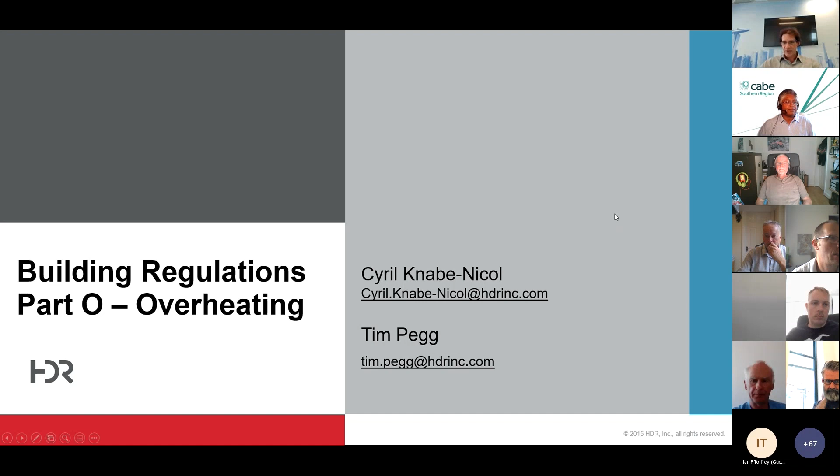So if we dive into the presentation now directly, if I can change the page. There we go. So building regulation Part O started to take full enforcement just a month ago now, on the 15th of June. This regulation is applicable to all new residential schemes.

There is a tricky aspect, in that Part O also applies to long stay residential, such as care homes and student accommodation, which can represent a more challenging approach to mitigate overheating, as the dynamic of the system is very different than what you'll find in a typical residential property.

Part O, in terms of building regulation, is also linked to Part L in terms of transitional arrangement. So if a scheme has been registered with Part L and you are within the current 12 months of transitional arrangement within your notice, you don't necessarily need to apply Part O.

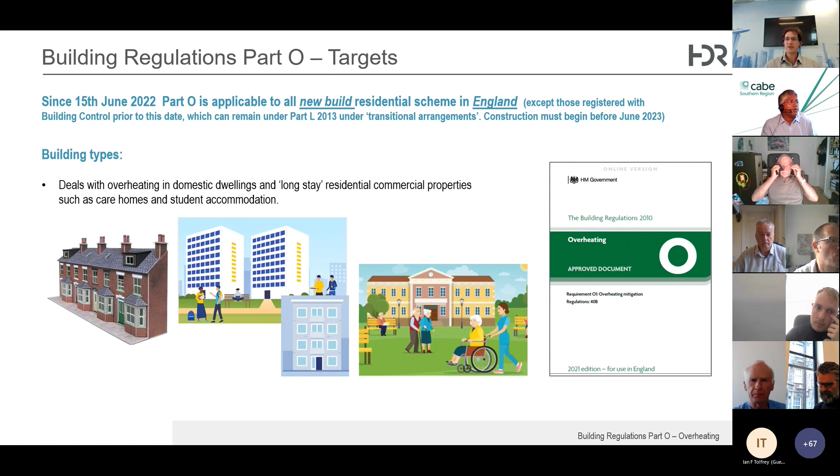And that means the construction of the dwellings or the block you're looking at need to start before June 2023. So the purpose of Part O, essentially, is to mitigate overheating within the dwelling, especially looking at unwanted solar gain.

And all of that is taking place in how you're going to set up your dwellings in terms of orientation, massing, shape, form, ratio of glazing. And we need to provide a means to remove the heat from the building to the external aspect.

Part O considers two different methodologies to assess this. We have what we call the simplified method, and if we cannot use the simplified method, we need to demonstrate compliance using a dynamic overheating assessment.

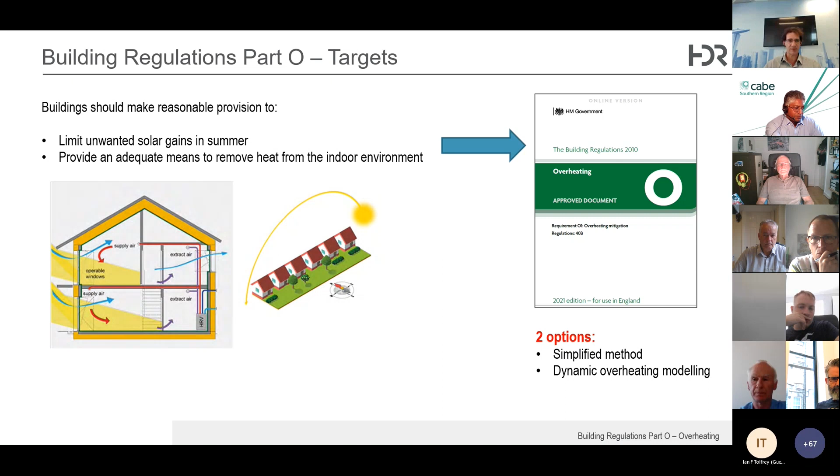So if you are looking at the Part O appendices and you want to develop your project, you have a list of postcodes which tells you which areas are at risk currently and what needs to be focused on.

There is another aspect I would like to touch on as well: Part O is a statutory requirement as part of building regulation. But what you need to keep in mind is overheating is increasingly focused on and reviewed by local authorities now. So even if you could use a simplified method because it's easier and applicable to your project, it's possible that the local authority will push you to assess the dwelling based on the more dynamic simulation.

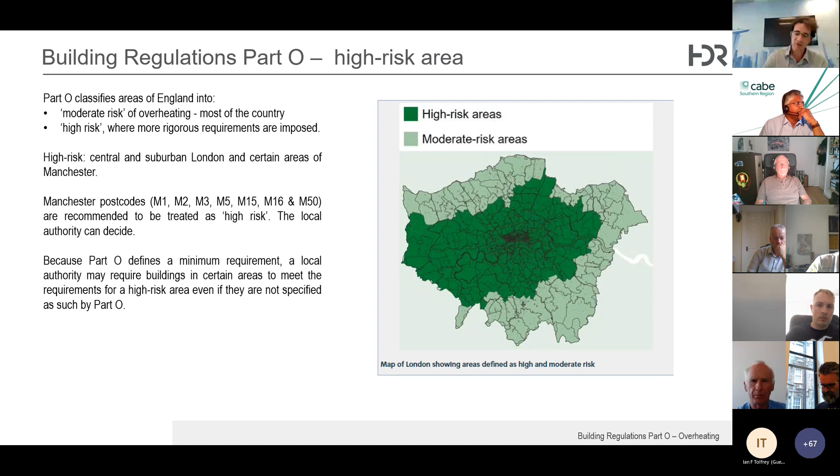In London, for example, and the surrounding area, most projects now are all assessed around the dynamic methodology. We're not even considering the simplified method. This is also applicable to some areas around Birmingham, Manchester, Leeds, and Brighton as well. So you need to be mindful not only of the regulation, but of what local authorities are aspiring to moving forward.

So, openability of the windows. How are we deciding which methodology we need to follow, either simplified or the dynamic simulation?

We need to ensure that the surroundings of the building allow us to use the simplified method. The first one is noise. If the noise level exceeds an average of 40 dB over a period of 8 hours, which means that we cannot open the windows for assessing overheating, we cannot use the simplified method. If we go above 55 dB over 10 times at night, it's the same thing, as a peak. We cannot open the windows, and therefore we need to go straight to a dynamic simulation.

This requires getting an acoustician involved very early in a project to assess the location of your site. A lot of sites now being redeveloped around train lines, busy roads, close to airports, around the Slough area, mean that we cannot use the simplified method and need to go straight to a full dynamic simulation.

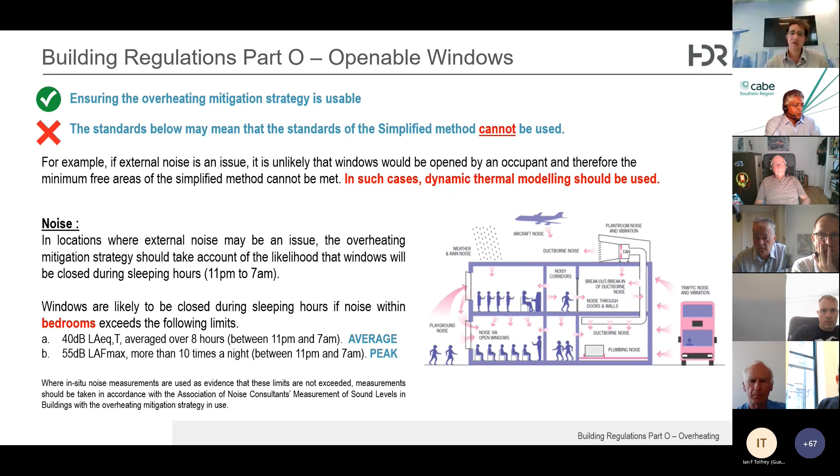This also needs to be reviewed in accordance with the ANC guidance that was provided in March 2021, which sets out some noise levels as well. So I would recommend that when you start looking at the site, engage with an acoustician so they can give you an indication of how you can deal with openability of the windows.

The other element is pollution in terms of air quality. Outside the big cities now it's not too much of an issue, but we need to assess the air quality if you're close to a train line or busy road as well. That can have an implication.

Security - essentially how we can open the window is critical for ground floor bedrooms and ground floor dwellings, whether in a block of flats or houses. Security measures need to be taken into consideration, and the flexibility and lockability of the window need to be assessed to decide what kind of methodology we need to use.

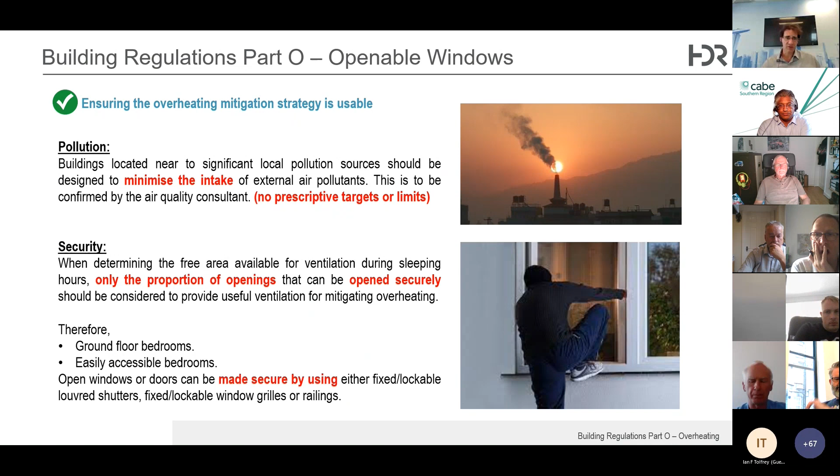And the last one is protection from falling. Part O has a very strong view on how the window can be opened depending on the height of the building, and this is linked with approved document Part K.

The area of window that can be opened depends on how you are standing in the inward face of the wall, and you need to have at most approximately 650 mil to the handle. So this essentially restricts your area of aperture for the window and the amount of fresh air you can use. Depending on how that works, you can use the simplified method, but it will restrict significantly the area of fresh air that you have.

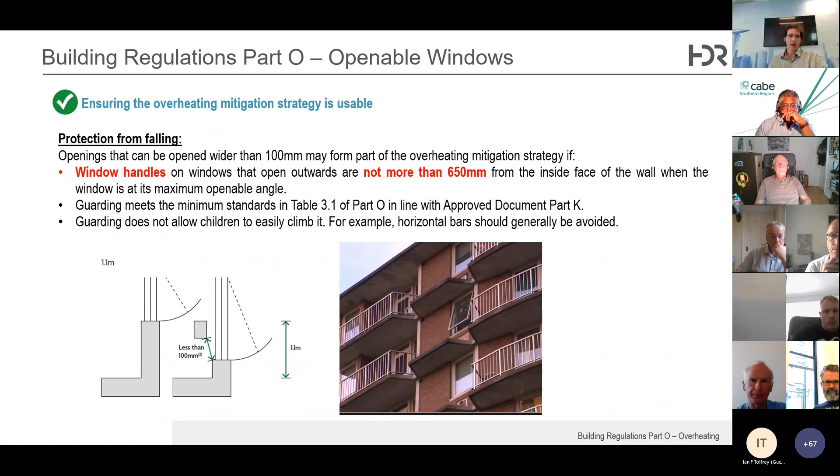So two options, the first one is a simplified method. How can we define if we want to use this methodology? If none of the previously mentioned constraints apply to the property you're designing, and you establish that the design can apply purge ventilation to every habitable room with openable windows, then we can use a simplified method.

Also when looking at multiple dwelling sites, especially blocks of flats, we need to ensure the distribution of hot water and space heating is done through a vertical riser, not horizontal, so we avoid impacting or mitigating overheating within the corridors. If you satisfy this criteria, we can use a simplified method.

If not, we will need to go to a thermodynamic model, linked to an adapted version of the CIBSE TM59, which covers overheating in new dwellings. That will dictate the windows, how we mitigate closed windows, how we mitigate noise pollution, and how shading can impact design. We'll come back later through the dynamic simulation to explain the process.

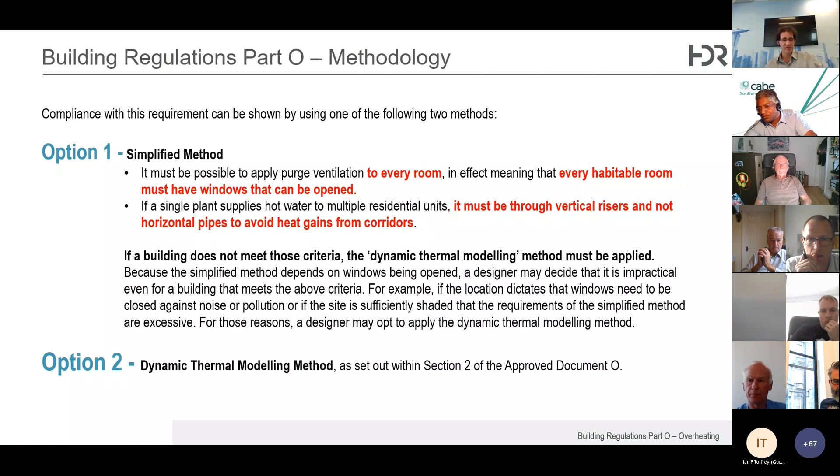So there are two aspects to a simplified method. The first is we need to ensure we have a maximum allowable window area to the building and habitable room, and that there is a minimum openable area to those windows. These are the two criteria, rationalized in relation to your floor area.

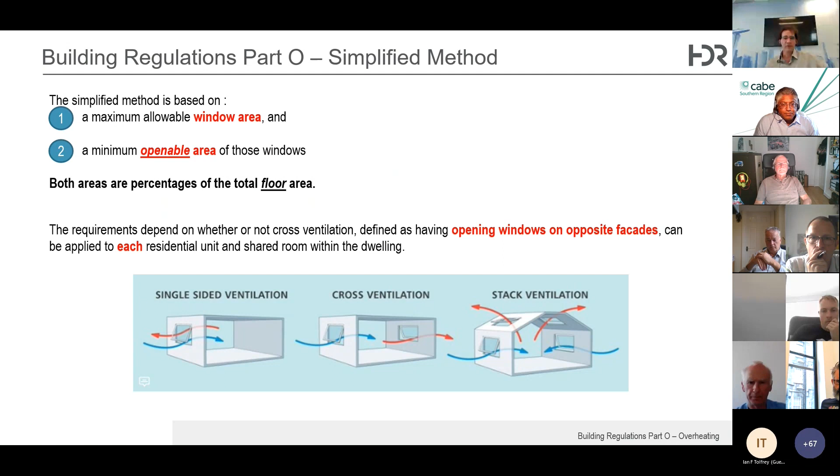Essentially, we need to ensure the requirement depends on whether cross ventilation is possible with openable windows on each facade, which is the example in the middle, or if you don't have cross ventilation, which is the left-hand side. So without cross ventilation, what are we looking at?

Depending on the orientation of your facade, we need to assess that the maximum glazing area does not exceed either 15% or 11%, and also that the area of glazing, in relation to the floor area, does not exceed the value on the left-hand side.

As you can see, the key element—if you remember the areas of high risk and low risk—depending on where your dwelling is, you have different values allocated for how big your glazing area can be. On the south facade in a high risk location, we only allow 11% glazing, whereas in a moderate area we can push that up to 15%. This is quite a significant change depending on the location of the building.

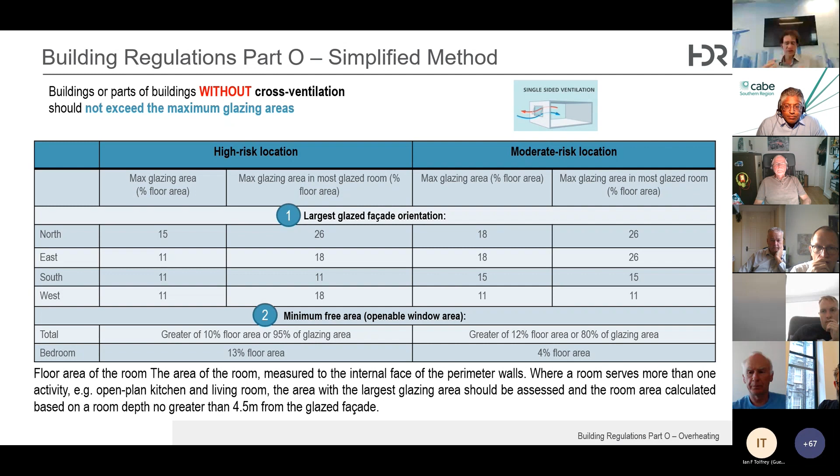The free area is how much your window can open. In total, we need at least 10% of the floor area that can be open. For a bedroom, we're looking at approximately 13% openable area in high risk, dropping to 4% in moderate risk. The measurement is essentially established for the whole of the walls, on a room-per-room basis.

When we have cross ventilation, we get a lot more flexibility, because the flow of air going through the building helps cool it, and there is movement allowing a larger area of glazing. So we are exceeding 18% on the east and west facades, and around 15% on the south and north. The maximum glazing area goes up to 37% depending on orientation.

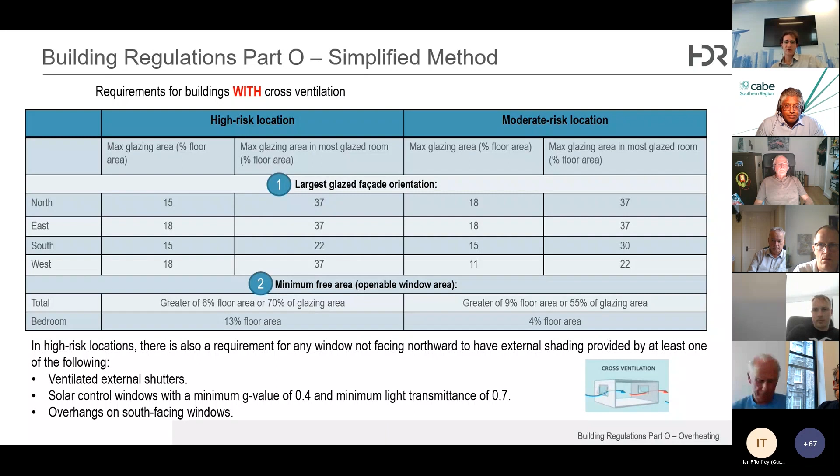What we're focusing on here is that there is a risk for any window not facing north to require external shading, so shading is also very critical. You can take into consideration external shutters, solar control such as solar film applicable to windows, and overhangs are also recommended on the south facing facade.

So what did we do to understand what this simplified method means? We worked on a project which is a three-story building—ground, first and second floor—with cross ventilation used there. We measured the floor area, shown here as a red line around the perimeter of the building, and used this data in the calculation.

Within the document, there is a link to a full Excel table that can help you get the calculation done. We've done an example based on these dwellings.

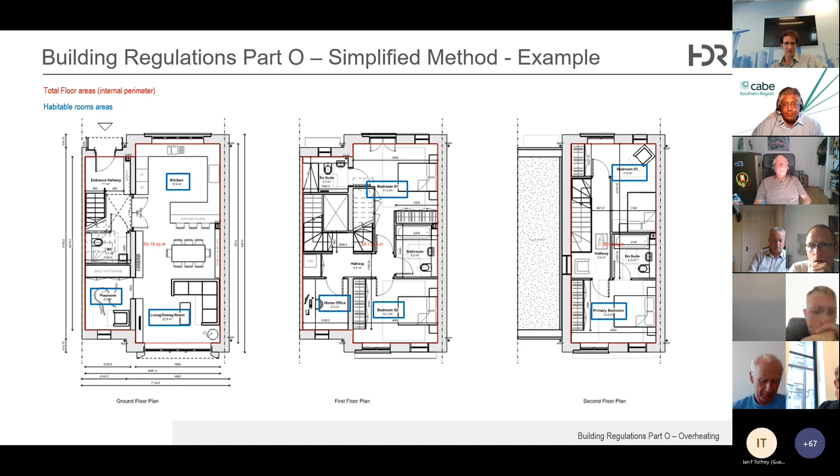In terms of windows, how do you calculate the area? You need to take the glazed area, however the frame needs to be excluded. This is a big difference between Part O and Part L. When you look at windows on Part L, the energy side, you include the frame for heat loss. In Part O, we only focus on heat gain coming through the glass, so we only take the glass area altogether. That's how the measurement needs to be done.

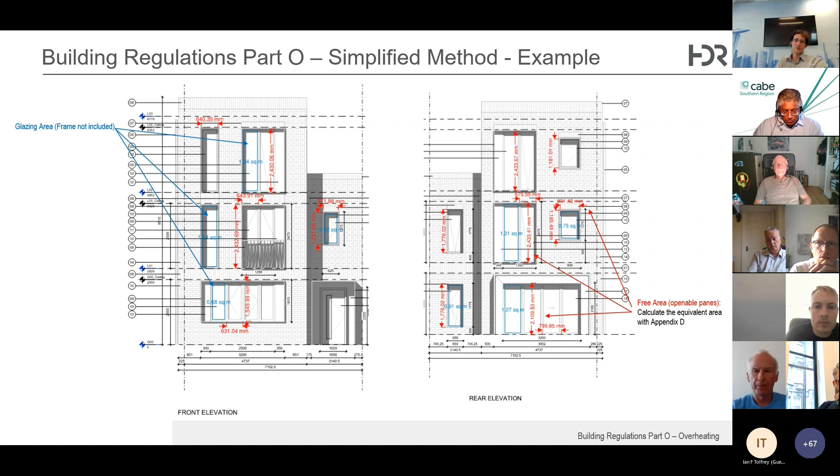The free area of the openable windows depends on Appendix D of Part O. There's an angle showing how much you can open the windows, depending on Part K and the restrictions of the building and security.

So for that dwelling, if we start looking at some maximum window area, on the south facade we had a total floor area... no volume, volume is gone.

Hello, he's muted. Cyril, we lost your mic.

Sorry, I got muted. So I was saying, on the south facing we're getting approximately 8.6% area of glazing, which is below the maximum requirement. So we're in a good situation there in terms of overheating.

When we look at the second criterion, the maximum glazed area for the room, on the south facing we're going up to 20.18%, and here we have a maximum allocated area of 30%. So altogether, the Excel spreadsheet provided gave us a pass.

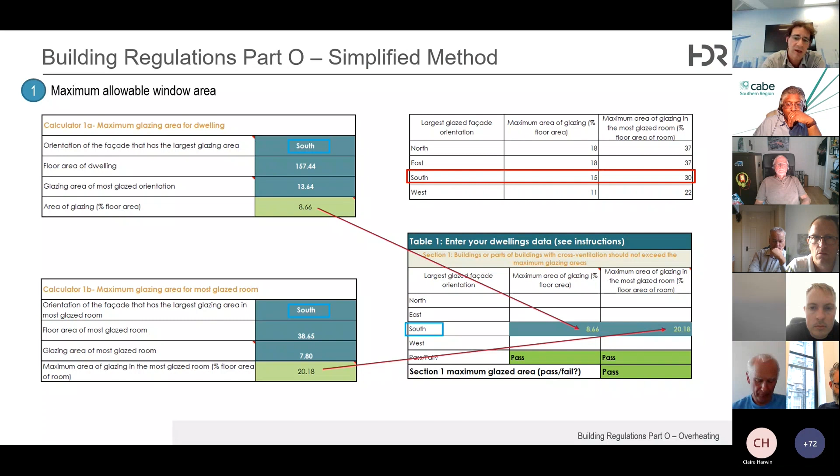Essentially, when you assess your dwelling on the simplified method, you need to provide the drawings and this Excel spreadsheet showing the pass for each dwelling to your building control officer, and that's what they will use to confirm compliance. The question is, how do you calculate the openability of the windows?

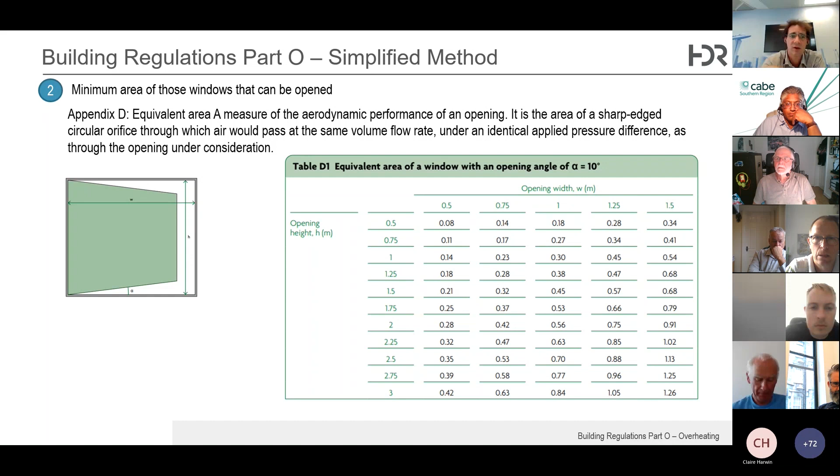It's difficult to establish the requirement of fresh air coming in and how you define that. However, a matrix has been provided based on the maximum angle of openability of 10 degrees, allowing you to size your windows depending on the height and width. You can use this matrix very early as a tool to size your windows with a 10 degree openable angle to meet the criteria.

And if we look in practicality, what does that mean for the dwellings we're referencing? We had a wide range of windows going between 0.6 and 2 meters high in some of the bedrooms. We didn't have any issue in terms of noise, air quality, or security, so we could have the angle open much wider, giving us a free area around 14.47%.

When we rationalize all of this against the area of the dwellings and the glazing, we ended up with a percentage of floor area based against openability at just over 9%. When compared against the glazing area, it's 56%. So we're getting a very good result here, showing that we have little risk of overheating altogether.

And this is all coming up - on the left-hand side, this is done for the whole dwelling. So you need to do that as a whole dwelling area, but after that you need to assess the room independently, because you need to ensure that every habitable room provides thermal comfort for the future occupants.

So this is quite critical to meet these two requirements, 2A and 2B. Both need to be compliant with the regulation itself. This is why you need to spend time sizing the windows and the openability very early on.

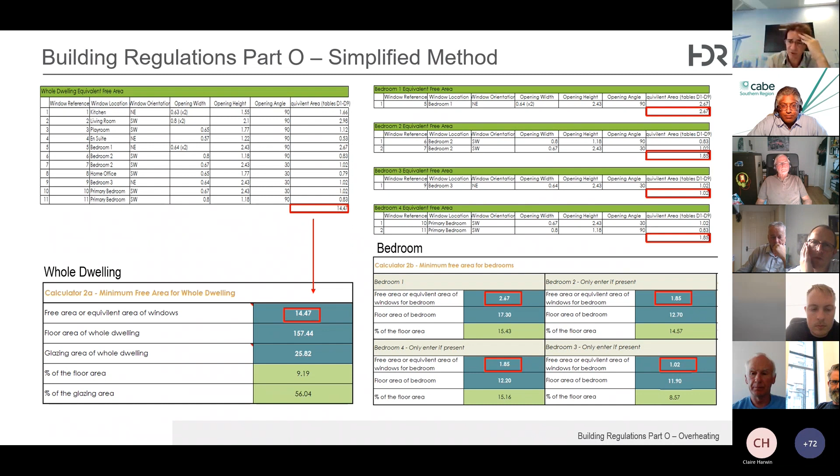So if we are looking at these specific dwellings, the floor area, when we calculated, we had a fail on the percentage of floor area. We were below the minimum allowed of 14%, and here we're getting only 9%. However, across the whole, when we had the bedroom and the room assessed independently, we managed to get a very good result, giving us a full pass and full compliance within the dwelling there.

The 9% there, we had 9.19. We were supposed to be at 9% on the floor area. This is why it's red. I think within a tiny bit of tweak, maybe putting a cupboard on one of the rooms, we should be able to get that to pass. So there is some slight design that can help you get the compliance when you need to think a little bit outside the box.

So your red line within the building and how you define the zone is critical, and how you assess your floor area as well. So when you put all of this data within your spreadsheet, you see at the end you get a summary box which gives you pass on the dwelling, and that needs to be provided to building control. You need to establish that if we are meeting the requirement of the simplified method, we just need to get the compliance with the cross ventilation. If we don't have cross ventilation, the same principle applies, but there is a value, the benchmark, which changes, and they will assess that as well. But essentially the metric can be done on the desktop study, and it's really straightforward.

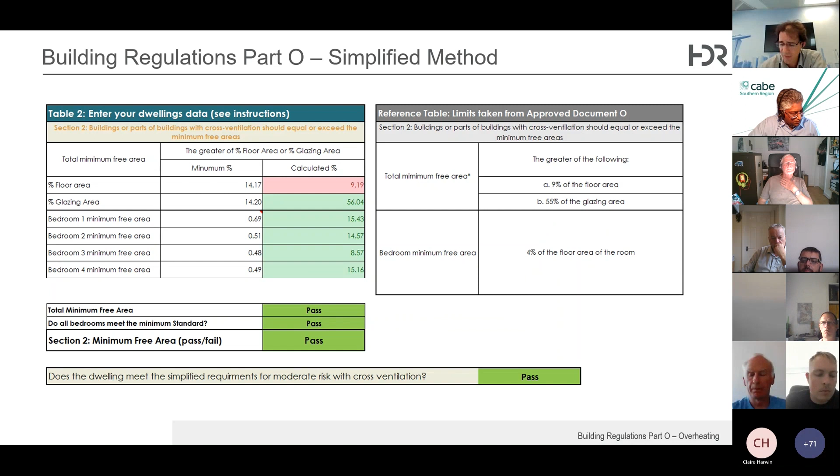Where you need to be careful is if there is any change on the design as the design progresses, you need to ensure that you haven't modified any of the measurements needed as things go along. Ideally, you would like to do an exercise to assess how you pass with the simplified method at a very early stage, almost planning stage, at the end of your stage 4, and you need to do it as well for final sign-off by building control at post completion.

So now, if you cannot get compliance because you have constraints around the site, like noise, air pollution, security, or your simplified method fails, what is your alternative? The alternative is a little bit more tricky. It means that you're going to need to go to a full dynamic simulation model based on the CIBSE TM59.

The TM59 was published in 2017. However, Part O has adapted some of the requirements in terms of temperature and how we can have the space occupied, and therefore the TM59 is not fully compliant. We need to have a version adapted to meet the Part O requirements. Essentially, there are two aspects and two criteria to be met.

If we are talking about a naturally ventilated home, which means that overheating is managed by openable windows and your internal ventilation is just an extract fan for your wet room, we need to ensure that the window area overall is at least 5% of the floor area. There is a risk of overheating if the bedroom is warmer than 26 degrees for more than 1% of the year during sleeping hours, defined as 10 p.m. to 7 a.m. But also no habitable room should exceed a comfort temperature for more than 1 degree for more than 3% of the annual occupied hours.

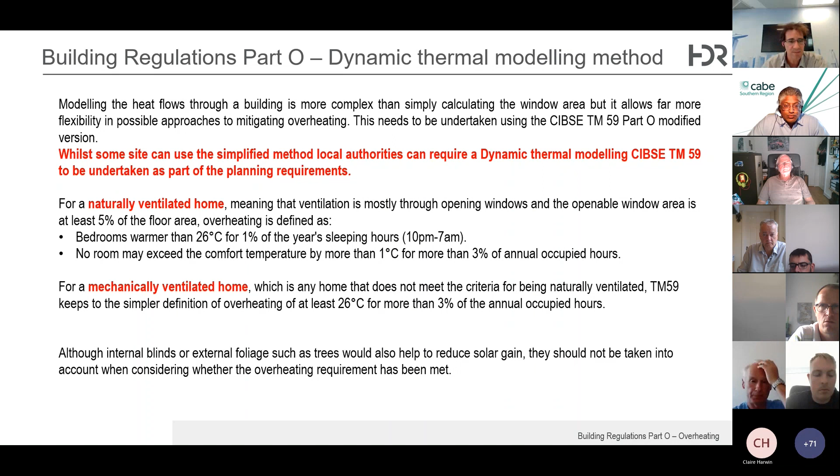The changes between TM59 and Part O are essentially around how we define occupied hours and how long we can allow windows to be open at specific times. During daytime, windows can be open between 8 a.m. to 11 p.m., assuming they start to open when the temperature is above 22 degrees.

And below 26, that's when it can start, and at 22 they need to be fully closed. One key element here is if we have a site that is really noisy, that's why noise is critical - windows for the purpose of overheating will need to be closed. Therefore we rely on a full mechanical system and demonstrate compliance with Part O and TM59 using some kind of alternative technology.

When there is an issue such as noise, one easy solution we found is using some kind of cooling coil at the MVHR, which just increases the size of the unit in the utility cupboard. But this is not fully active cooling - it's just allowing the tenant to get some tempered air, so they cannot reduce the temperature to just 16 degrees. They only allow the temperature to be mitigated to get compliance with the requirement and not exceed the maximum allowance.

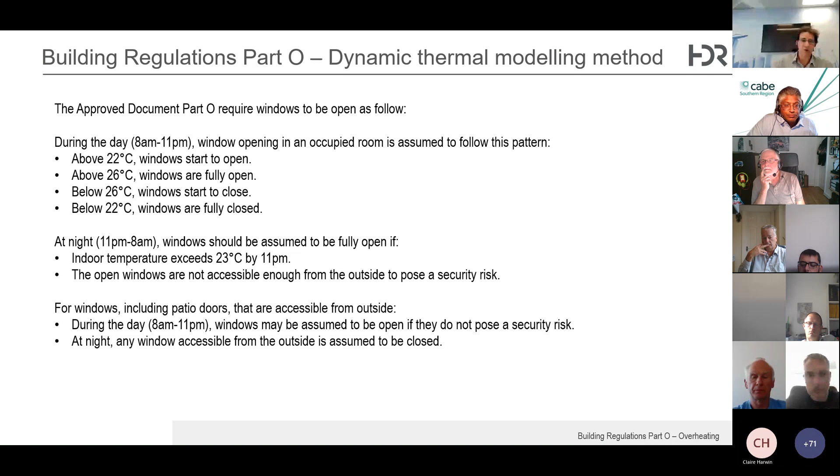So to wrap up this presentation, there are two guidance documents published on the 15th of June - one is Part O, the other is Part L. Part L is pushing a lot towards fabric energy efficiency, compliance with carbons, and reducing energy within dwellings. And because this energy is reduced within dwellings, that impacts how you're dealing with overheating. But overheating and the size of windows impact Part L as well.

So we highly recommend that when you design a dwelling and assess it, Part O and Part L need to be undertaken in parallel because they will both inform each other.

As you've seen recently, a lot of the Part L and energy models now, to meet fabric energy efficiency and primary energy requirements, have a tendency to push toward very high design standards, pushing the building envelope U-values very close to some passive house standards or very strong building insulation. But that also means we're starting to have very airtight dwellings.

And what does that mean? Airtight dwellings mean we need to provide mechanical ventilation as a means to provide fresh air, temper it, and provide good comfort to the occupant. That impacts your Part O approach - what kind of strategy you use and what methodology you use to assess the dwellings altogether.

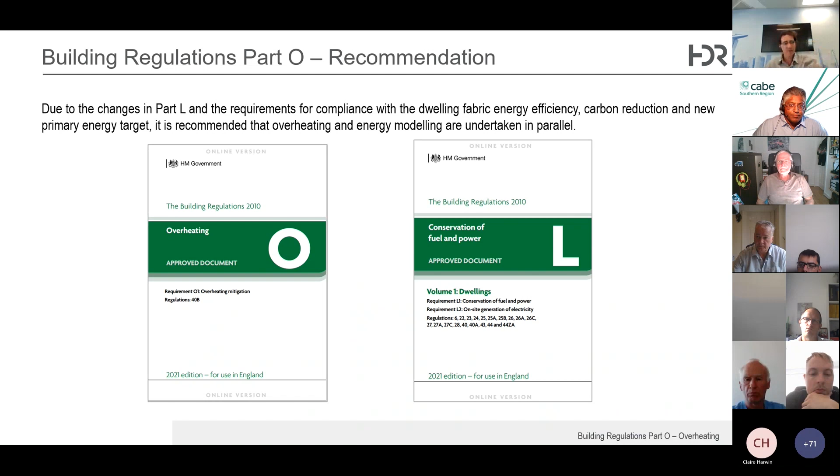I'll lead by asking a few questions. At the beginning of the presentation, you showed us the different types of buildings for the simplified method - one with cross-flow ventilation and one with no cross-flow. What would be the ultimate length of a building where you don't have cross-flow ventilation? In the old Part F, I think there was a requirement that the distance had to be no more than 6 meters in length for you to get the movement of air around that building. Is there any criteria in Part O regarding the actual length of a one-sided vented building?

No, that still remains the same.

That's still referring to Part F. Part F was updated as well, and it's still written as it was previously.

Everything is all about north, south, east, and west in your design. What if a designer decided to place their building southeast, southwest, or northeast? How is that calculated? That's interesting, because currently we haven't seen clarification on that—they only mention literally south, east, west, and north. So we don't have the half orientation.